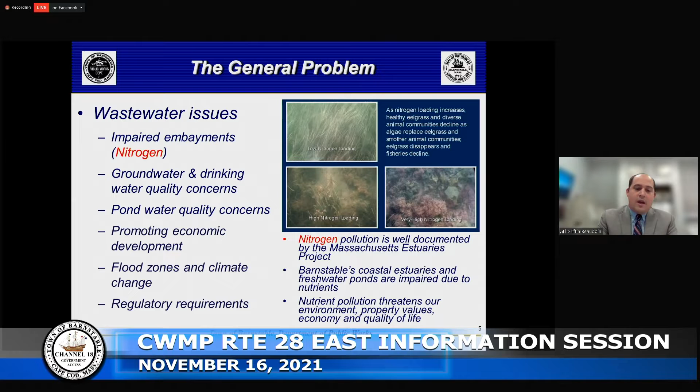Title V septic systems do not effectively remove nutrients, and thus sewers are a large component of our proposed plan in order to resolve this issue.

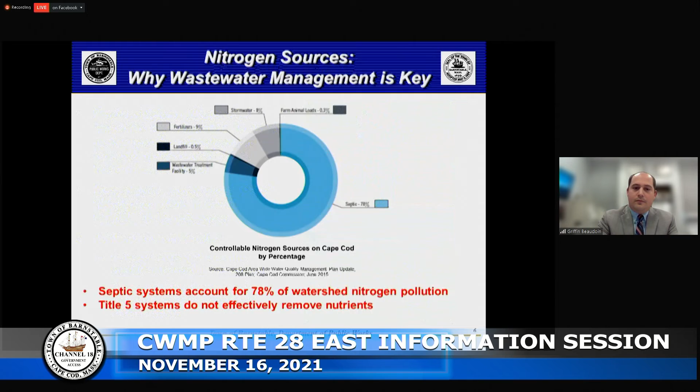So what's the cost of doing nothing, or inaction? The Federal Clean Water Act requires communities to meet water quality standards in coastal waters and some freshwater bodies. Barnstable is required to meet the total maximum daily loads, or TMDLs, for nitrogen in our various coastal embayments. Failure to act swiftly could result in further damage to water quality and water resources, as well as the town being at risk of a court order, lawsuits, and/or regulatory enforcement.

So this is a figure of the town's comprehensive wastewater management plan, more specifically, the town's sewer expansion plan. Areas in red are in phase 1 of the town's sewer expansion plan, or the first 10 years. Areas in green are in phase 2; they will receive sewer in the second 10 years of the plan, or years 11 to 20. Areas in yellow are in phase 3 of the program and will receive sewer in the third 10 years, or years 21 to 30 of the program.

I'll bring your attention to the yellow line on the right side of this figure. This line designates and really represents how important the Route 28 East Sewer Expansion Project, which is the project we're discussing tonight, is to this program, as every parcel to the west of this line will utilize the infrastructure that's going to be installed as part of this project.

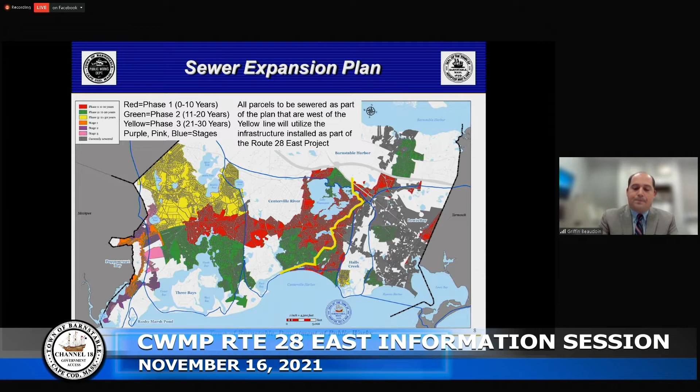This figure shows the 19 sewer expansion projects that are included in the first 10 years, or phase 1, of the sewer expansion program. The red box designates the Route 28 East Sewer Expansion Project, which is shown in more detail in brown. With that, I will turn the presentation over to Mike Faulin to talk in more detail about the Route 28 East Sewer Expansion Project.

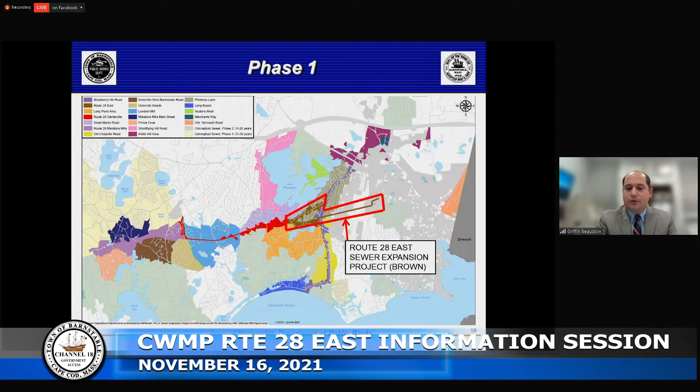Thank you, Griffin. I appreciate that.

Continuing on, talking specifically about the Route 28 East Sewer Expansion Project area, it's kind of broken down into 5 main areas. I'm going to work from the west to the east. So we have a new pump station going in at the intersection of Phinney's Lane and Falmouth Road, which would be at the very western edge of this figure that we're looking at here with the yellow project area encompassed.

Phinney's Lane will have some gravity sewers between Falmouth Road and Wequaquet Lake. Falmouth Road is the primary piece of the project, which extends from the new pump station at Phinney's Lane all the way to the treatment plant at Bearse's Way. Along that route, we're inside and outside of the roadway. We pass by the Barnstable Intermediate School, and we've also worked in some water main improvements. I'll touch on all these in a little bit more detail in the following slides.

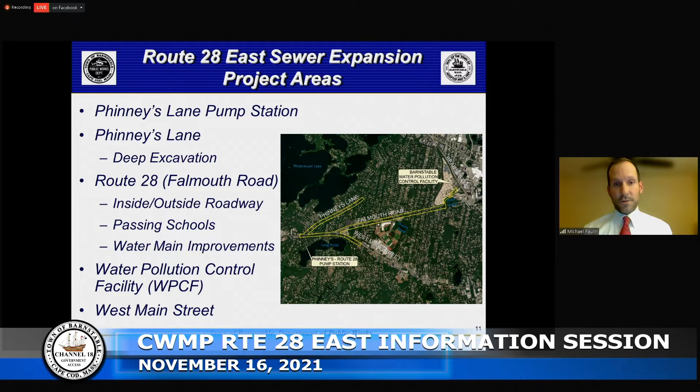So from Falmouth Road, the sewage is conveyed all the way to the treatment plant at Bearse's Way. And then we have a small section of sewers on West Main Street that are conveyed away from our project area to Strawberry Hill Road.

This is just a little bit of the numbers involved in the project. So we have about 8,100 feet of gravity sewers shown in green, which again is Phinney's Lane, a small portion of Falmouth Road, and a small portion of West Main Street. These green areas will sewer approximately 90 properties within this project area. The Phinney's Lane pump station ultimately, as Griffin alluded to, after the 30-year program, will handle approximately 7,200 properties in total. So going from the initial 90 properties to the 7,200 properties involves a little bit of staging of the design.

Initially we have a smaller force main that the pump station will utilize that will pump the sewage from the new pump station to West Main Street. As the flows build up entering that pump station, we'll use a new larger force main that will extend all the way down Falmouth Road to the treatment plant. That would be the yellow line on this figure. Eventually at full build out, there will be a second force main along that same stretch of Falmouth Road. So all three of these force mains will be installed as part of this project.

So there's a small segment shown in red where we'll have 3 force mains in Falmouth Road. And then from West Main Street to the treatment plant will be the dual force mains for future use.

Because we're doing construction in Falmouth Road, Hyannis Water will also be working on some water main improvements, which are shown in blue on this figure.

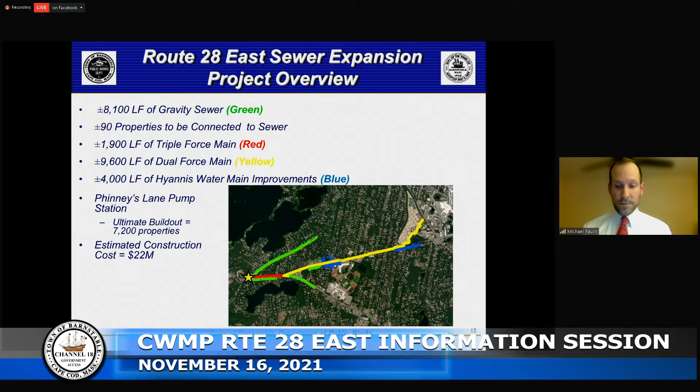So again, working from the west to the east, I'll start with the pump station, which is kind of the cornerstone of this project. So we have a new pump station going in at the intersection of Falmouth Road and Phinney's Lane at 1456 Falmouth Road. This is the site of a former gas station for those that might know the area.

Right now that site is vacant. So the new pump station will include a new building, and we're working to match that building with the surrounding properties in the entire Barnstable area, working with town staff and the town architect on the look of the building, which we'll look at in future slides.

In the chance of a power outage, the pump station will have a standby generator that will be located behind the building, located inside a sound attenuated enclosure, so out of sight of Falmouth Road and minimizing any noise.

As far as the driveway access, the previous site had an entrance and an exit. The new pump station site will have just a single entrance into the site to try and minimize traffic in and out.

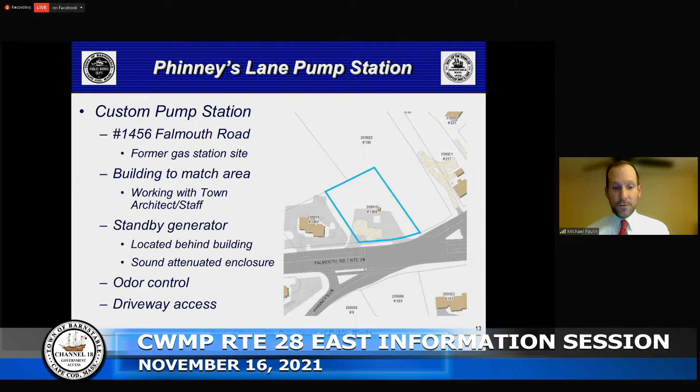The town will look into landscaping after the construction of the pump station is complete. The initial plans for this contract will just include loaming and seeding.

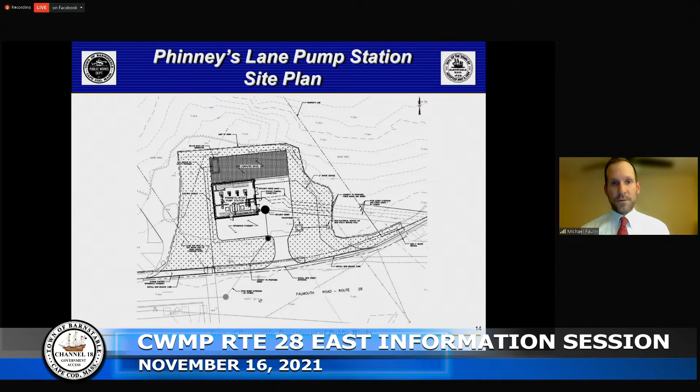This is just a quick look at the 3D views of the proposed building, again working with town staff and the town architects on the look to try and match the area.

The side with the 1 door and the 2 windows would be facing Falmouth Road. Double doors on the right side for equipment to be taken in and out, and then HVAC in the upper level and the attic level.

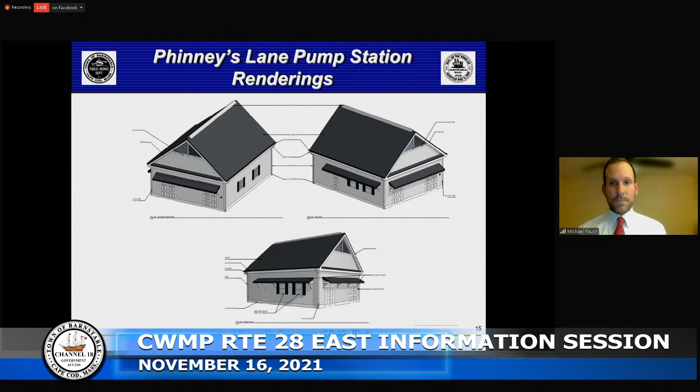So then just talking about the other of the 5 areas. So the pump station, again, is on the very left of this figure where the star is located. So Phinney's Lane will be a gravity sewer extending from Falmouth Road all the way up to Wequaquet Lake, flowing back to the pump station.

This is a fairly deep excavation, picking up some areas further north in the future, and also with some rolling topography. So the sewers end up being approximately 20 feet deep through this stretch.

So the sewers will be located as close to the center line of the road as possible to try and minimize any disruptions to the outsides of the road.

For this reason, it is likely that the roads will be closed in this area, and we will be detouring around, which there appear to be plenty of options for.

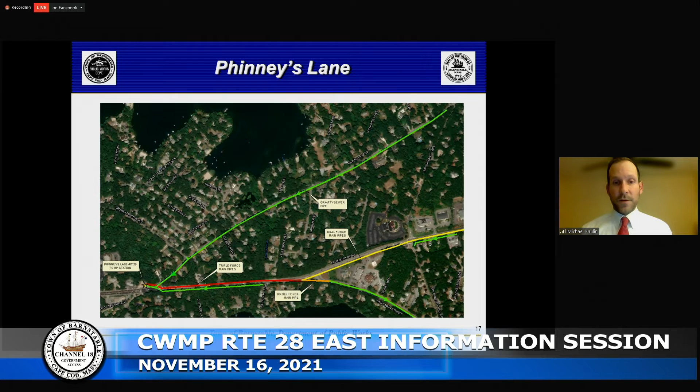Falmouth Road, again, there are some gravity sewers that flow back to the pump station, and then the yellow would be the 2 force mains for future use and some water main improvements. The sewers and the water mains are all located either in the eastbound travel lane or shoulder of the roadway to try and keep the westbound lane open for alternating traffic whenever possible. We envision that we'll be able to keep traffic flowing at all times in one direction or the other.

In some areas, we've tried to leave the right-of-way entirely to minimize traffic disruptions and pavement costs. So you can kind of see by this figure. Right in the middle of the figure is the Barnstable Intermediate School and the back entrance to the high school. We will locate our dual force mains in the sidewalk in these areas to get off of the roadway entirely.

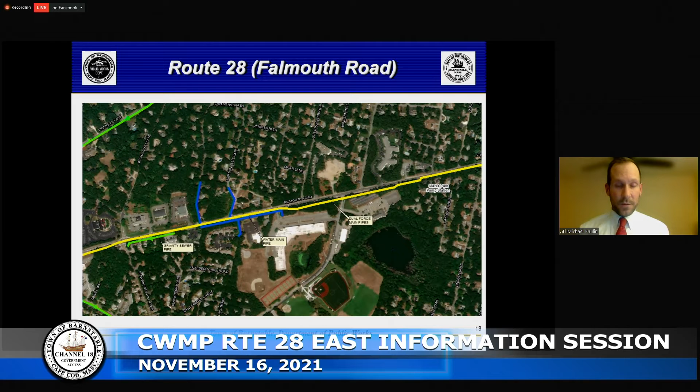So we'll be in the shoulder through the school area until we get past the solar panels to the east, and then back out into the eastbound lane of Falmouth Road. And then, since we'll be doing some work in Falmouth Road already, there'll be some water main improvements in this area as well, again, located on the eastbound lane and/or shoulder where possible.

This is just a snapshot of the Barnstable Water Pollution Control Facility where all the flows will be conveyed. Rather than continue down Falmouth Road all the way to Bearses Way in order to save traffic disruptions and pavement costs, the sewer will cross out of Falmouth Road before the Pitcher's Way intersection and cut across the town parcel adjacent to the existing sand beds.

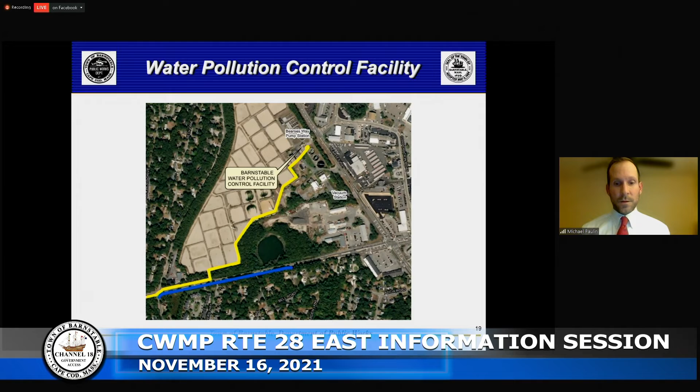So the fifth primary piece of this project is the West Main Street piece. Very small piece, but it actually flows away from our project area. You can see the single force main that will handle the initial lower flows coming in, shaded in orange. The gravity sewers will be conveyed to existing sewers at the intersection of Strawberry Hill Road, which are then conveyed to the Lincoln Road pump station and pumped to the treatment plant in that direction.

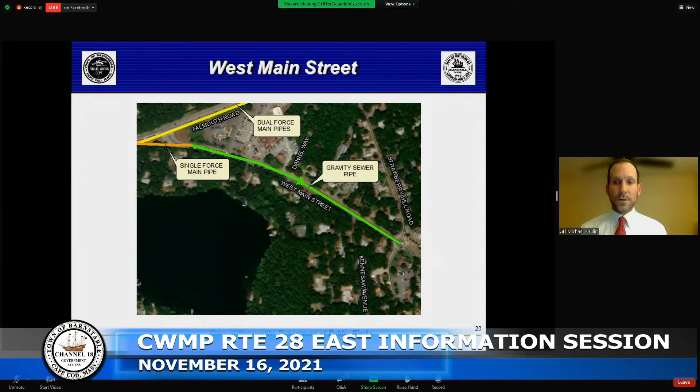So traffic management, I've touched on some of this already. Some of the project challenges include lane closures versus road closures and detours. Again, the deep sewers on Phinney's will probably have road closures. In the other areas, we envision lane closures, keeping traffic moving. Just one of the challenges we'll have to work on this project, and obviously impacts to the schools and the abutters.

It would be envisioned that we're going to try and do the work along the sidewalk in front of the schools during the summer if possible to minimize the impacts to the schools. Public safety, police details—we have police details budgeted into the project for all the work that's done within the roadway. Obviously public safety is the key factor that we're shooting for.

Emergency access will always be provided, even in the areas of road closures. And then again, Mass DOT being a key stakeholder, because we're going to be working within the right-of-way of Falmouth Road, we've applied for a state highway permit through the DOT, so we'll work with them on time-of-year restrictions and time-of-day restrictions.

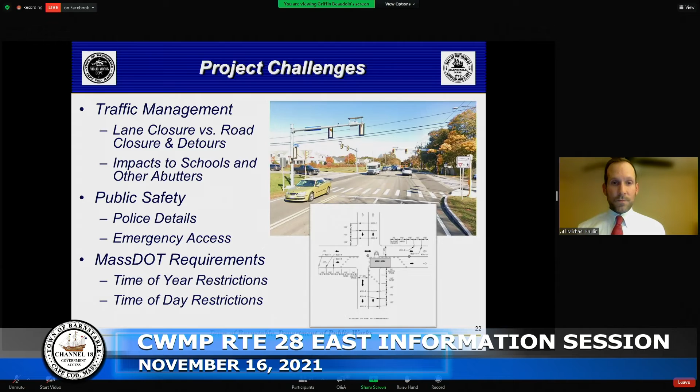So again, the work on Falmouth Road being the bulk of this work, with about 10,000 feet of the dual force main located in Falmouth Road. There are 4 major signaled intersections along Falmouth Road. We've made every effort to try and minimize the impacts through each of those 4 intersections.

Phinney's Lane, as you can see in this little figure here to the right, we've designed the sewers so that they cross over to Phinney's Lane before you actually get into the intersection to avoid the traffic impact of cutting through that intersection. At the West Main Street intersection of Falmouth Road, the pipes are all located in the shoulder, so we will not cross through that intersection.

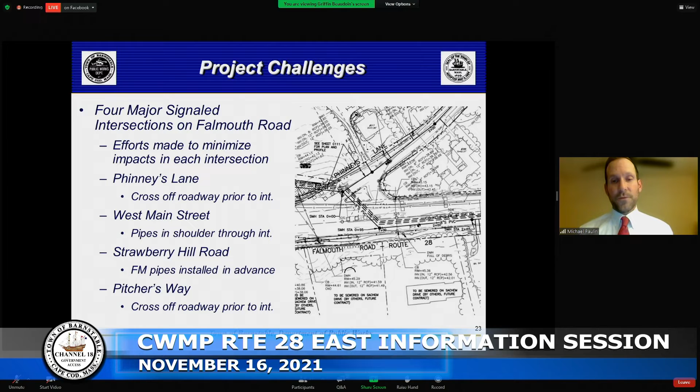Our preliminary project schedule anticipates going out to bid this winter, early spring, to start construction next spring, with an anticipated completion date of winter 2023, with potentially some work carrying over to spring 2024, such as the final paving. The general sequence of construction would be the main line sewer getting installed first down the middle of the roads.

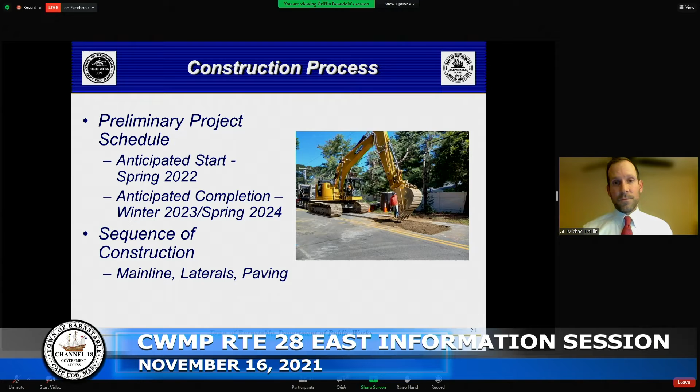At the same time, or soon after the main line goes in, crews will come back and install laterals from the main line to each property. Then the paving will be last. They'll come through with temporary paving initially, and once that goes through a settlement period, the final paving will follow. That's pretty much what I had for the project details. I'm going to pass it back to Griffin to finish up the presentation.

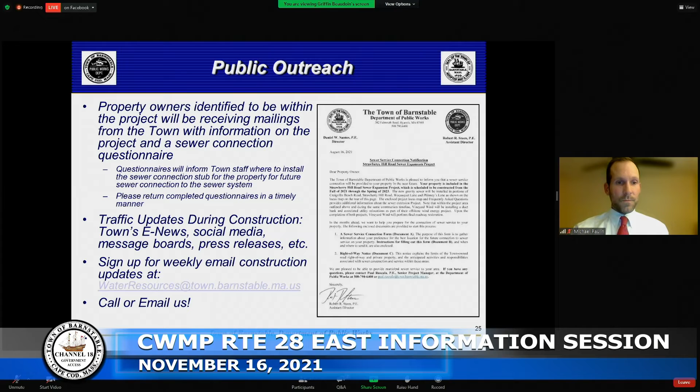Thank you, Mike. I wanted to briefly touch upon public outreach for the project. Property owners identified as being within the project will receive mailings from the town with additional information, a notification that they are in the project, and a sewer connection questionnaire. On the right of the screen is an example of a sewer service connection notification we sent out earlier this year for the Strawberry Hill Road sewer expansion project, which is currently under construction.

The sewer connection questionnaires we'll send as part of this notification process are very important, as they inform town staff where the sewer connection stubs for future connection to the property should be installed. For instance, perhaps somebody is interested in putting an addition on their property and they do not want the sewer stub left on the left side of their property as opposed to the right side.

This gives the resident the ability to communicate with our staff and provide that level of information to assist us in putting the sewer connection stub in the correct location for the homeowner. We request that you return these questionnaires in a timely manner. They'll be provided with a self-addressed stamped envelope and can be returned via email if that works better for an individual.